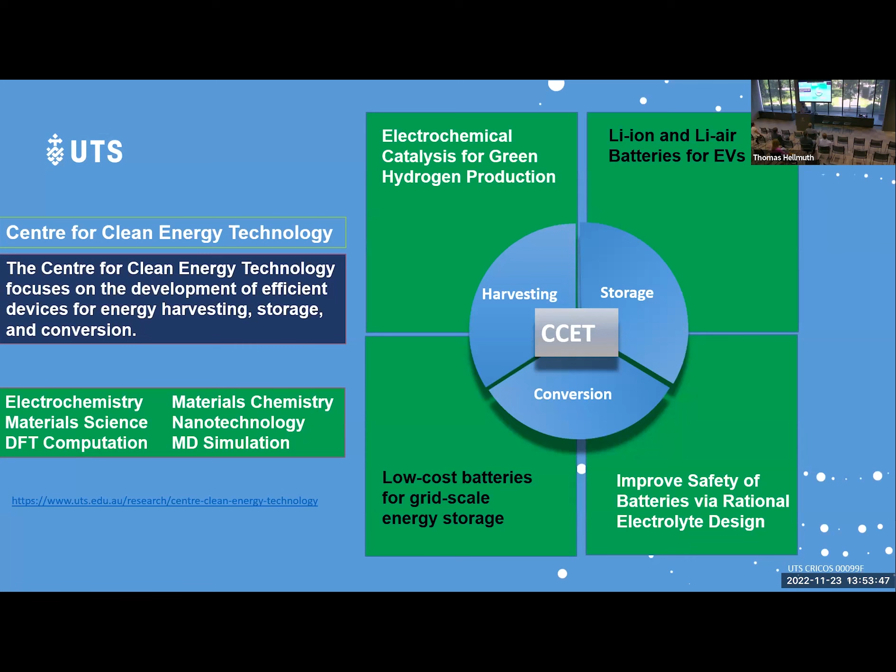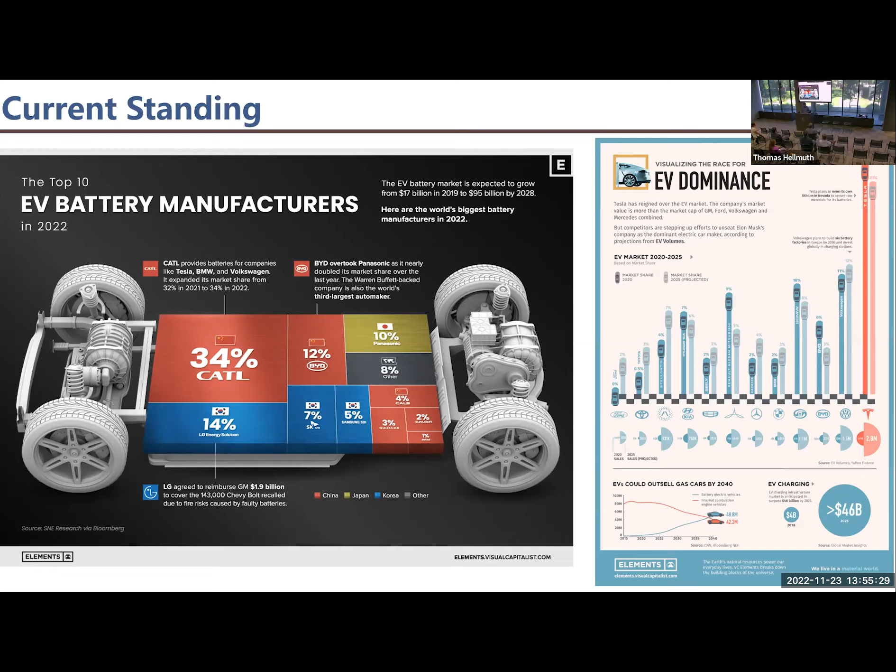And although batteries can be used in a range of different applications, if we just look at the electric vehicle, you can see that almost all big vehicle manufacturers are now manufacturing electric vehicles. And if you go to the right of this picture, you can see Tesla. And Tesla is now sharing nearly 25% of the EV market. And Tesla's market value alone is more than the next 4 competitors combined: GM, Ford, Volkswagen, and Mercedes. So that gives an idea which company is doing what and which company is making the best batteries at the moment.

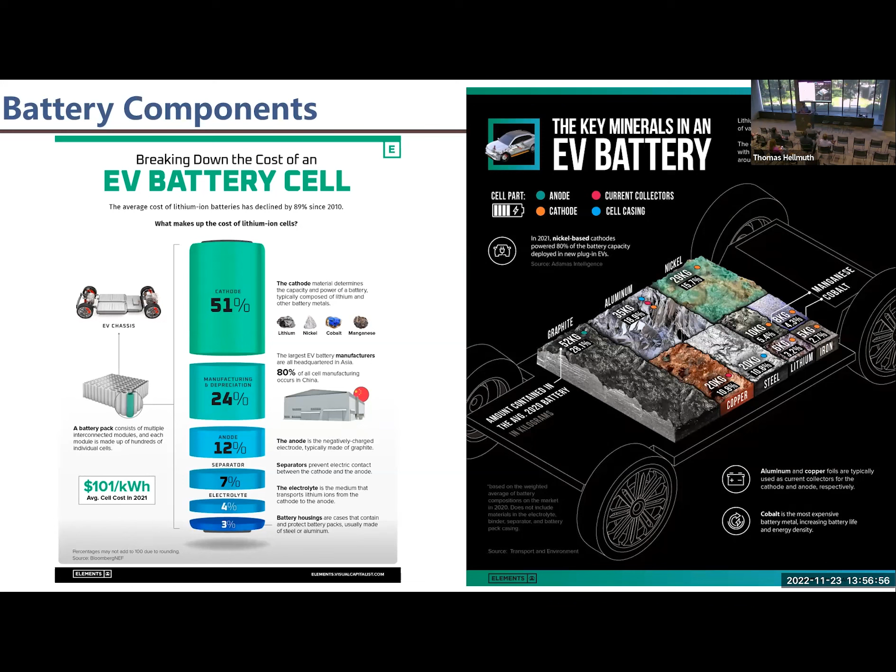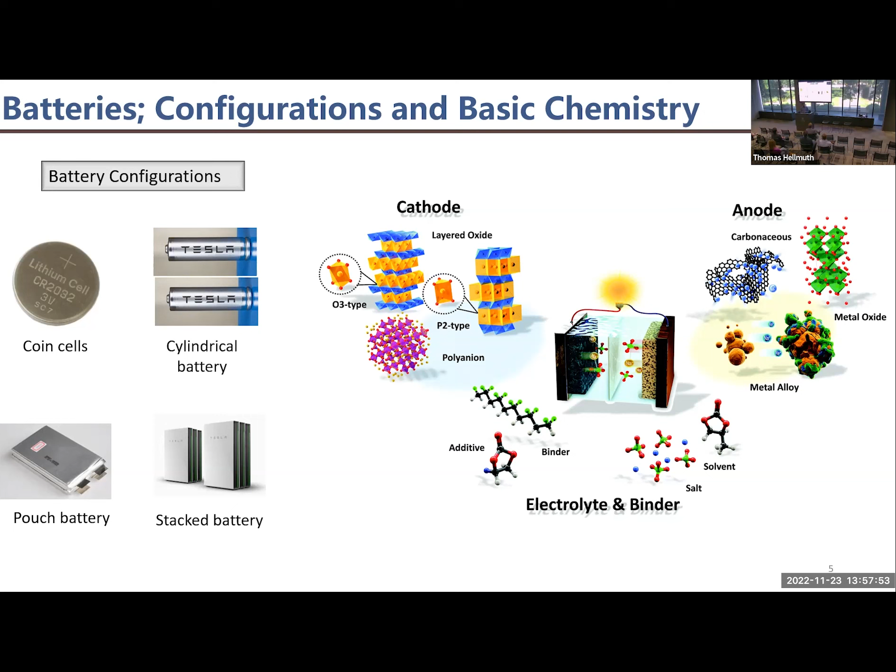And this gives us flexibility in designing the materials. For anode, mostly carbon materials, but transition metals have also been explored in the last 10, 15 years. Cathode materials are mostly compounds containing lithium, lithium-rich materials mostly. Electrolytes, liquids were mostly used previously, but now people are looking at solid electrolytes. So my research is mostly related to anode materials, but our center is working on anode, cathode, and electrolytes. So I will briefly introduce all the research.

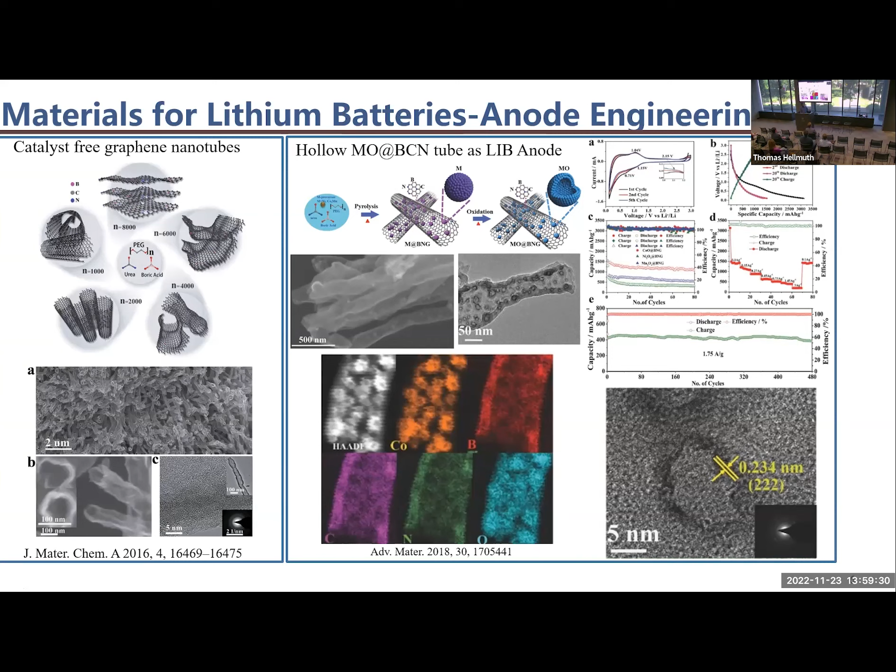So you can see here, these particles were then loaded onto this large diameter tube. And to further stabilize, we created empty spaces inside the particles by a second heat treatment. This provides enough space for reversible volume expansion of the particles. Together, these hybrid materials delivered very good capacity, around 1,400 milliampere hour per gram. That's nearly 4 times that of graphite, and also very good stability up to several hundred cycles. Just to say, there is flexibility in material design. We can design materials in a number of ways. This is just one of them.

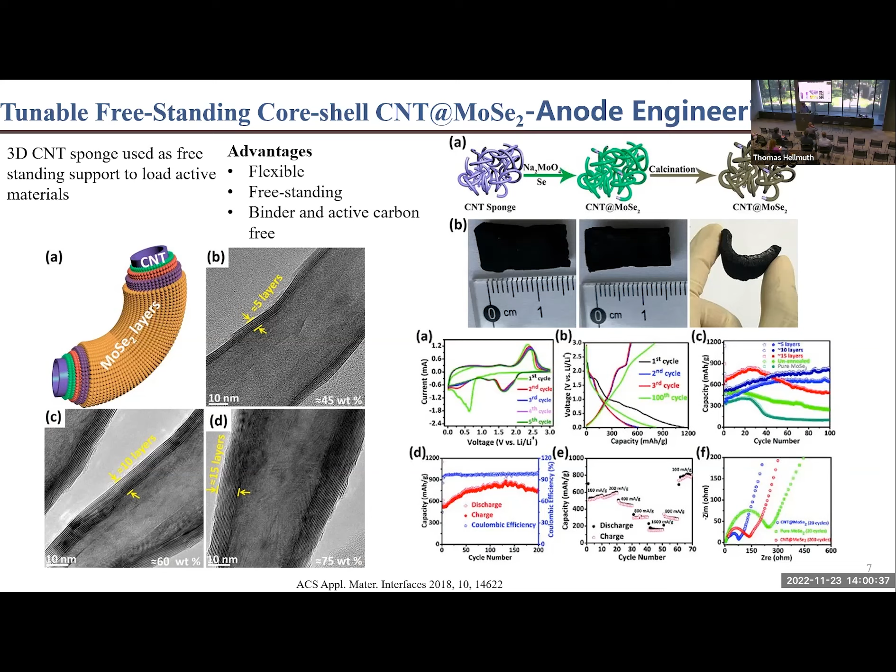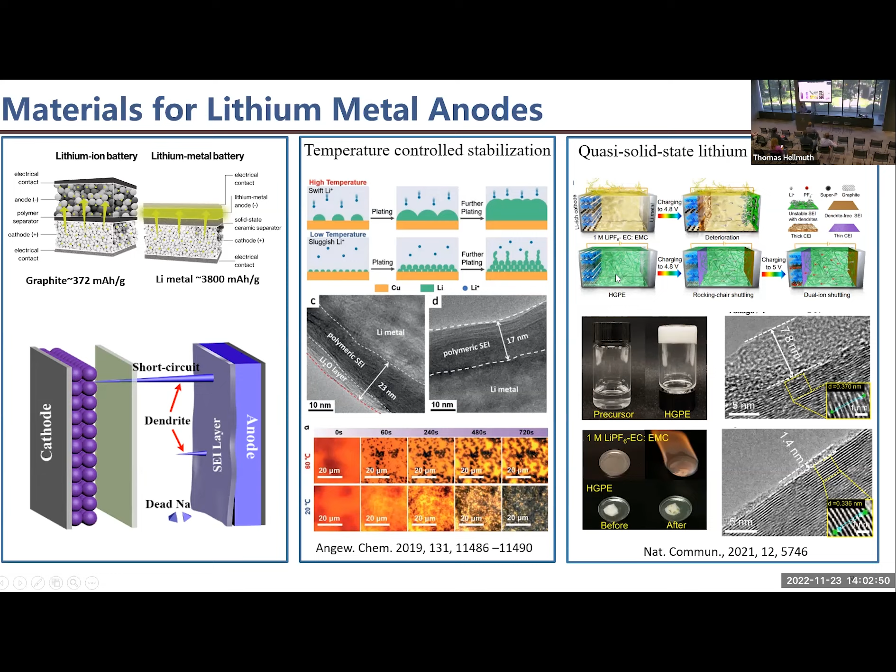Then our group is also working on lithium sulfur batteries, lithium selenium batteries. Sulfur is a very attractive cathode material that gives much higher performance. But one of the key issues with sulfur is that the polysulfides dissolve. Sorry?

Okay, then I will go to the paper which I want to talk about. As we can see, lithium prices are increasing. So our group very recently reported a methodology for lithium extraction from spent batteries. So this is an example for the cylindrical cell. If we open a cylindrical cell and this electrode is passed through this setup, this setup can extract lithium, and then that lithium we can get as lithium hydroxide in the end.

So what we have here is basically a solid electrolyte in these columns. That solid electrolyte is exposed to the electrode. So the lithium from this electrode moves through the solid electrolyte, and then lithium hydroxide solution is passed through this column. And that one dissolves the lithium that is transporting from this electrode through this column to the liquid. And eventually we get this highly concentrated solution. This is a very attractive methodology. So this is how it works.

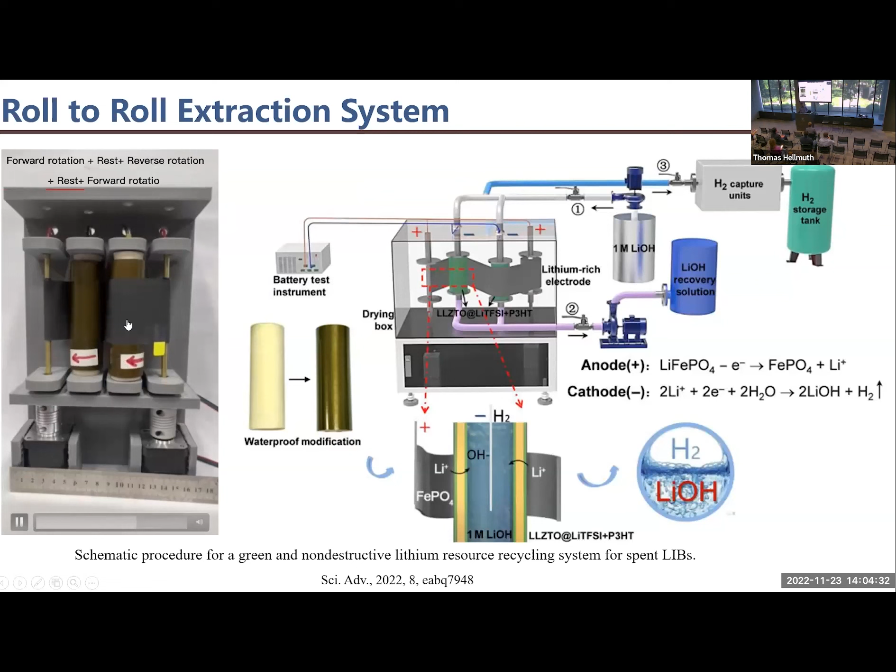I don't know if the video is fine or not, but this is a very attractive method because we don't need any pretreatment. We don't need any high temperature, any decomposition. So basically the electrode surface is maintained so we can extract other metals later. But at the moment, we can directly get lithium. We don't need to do anything. We simply pass our electrodes through these columns, and then we can get the lithium. So that's the idea from this paper.

And if you go by cost, basically, starting from a $1 battery, it can deliver up to $11 of materials at the end. And this is the cover picture that we presented. And of course, we want to reduce cost, increase the performance and increase safety.

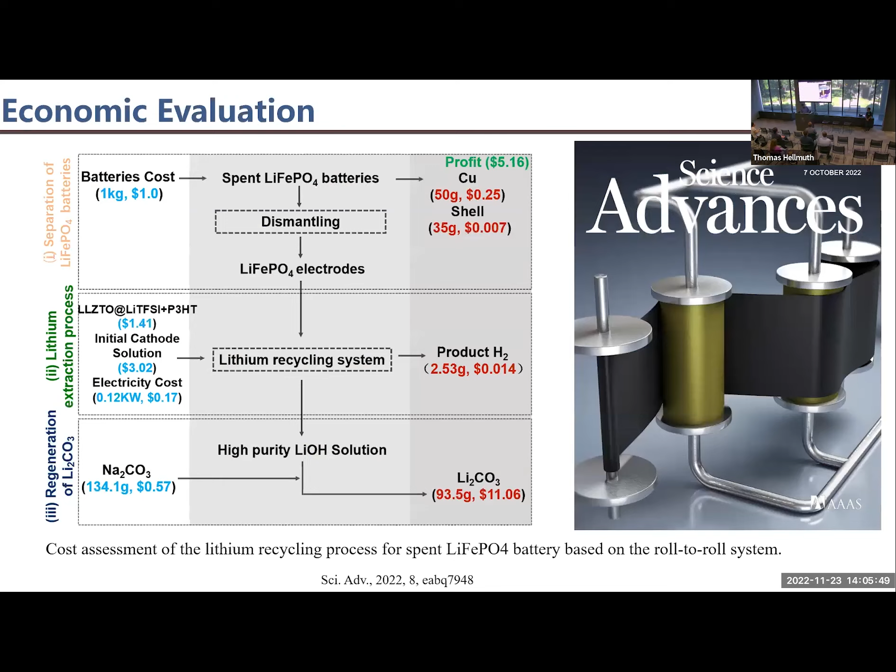Is there interest from the manufacturers directly now? Just because end of life batteries are much harder to dismantle, and we don't have manufacturing in Australia. Can that also be used on LFP batteries? Yes. So basically, if you see here, because of time I could not explain. We tested on a range of different cathode materials, and LFP is one of them. I think that manufacturing might come here. That's fine. Should be.

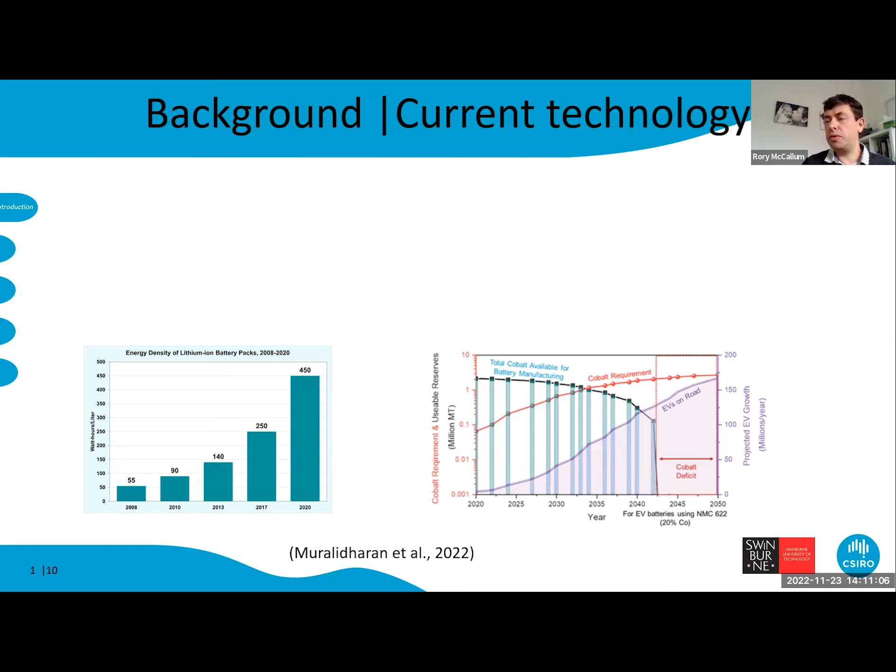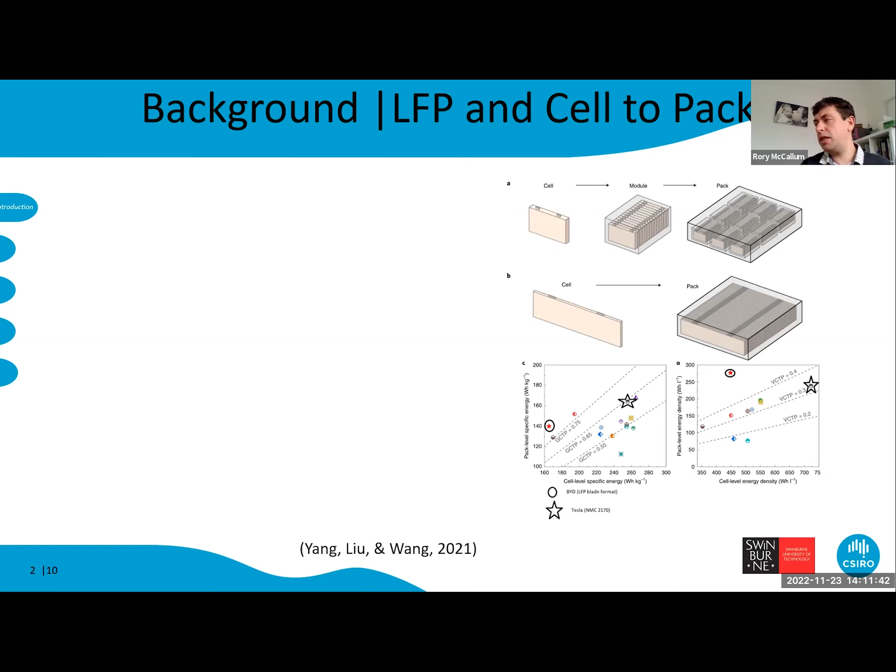If we look at the basic design of a pack, we used to develop cell, module, and pack technologies, where we got small cells, like 18650 cells, built them into modules and stuck them in a pack. The problem with these was that they weren't very energy dense - in some technologies only 20% of the whole pack was battery. Now we've moved to this more cell-to-pack design. CATL and BYD have both moved to this kind of technology, where we build single cells as big as a pack and get much higher energy density, so we can have 80% of the pack now just battery cell.

LFP is preferred, especially in China, because of safety requirements and because they have access to LFP - that's the main reason, they don't have cobalt. But it's also more thermally stable, so you can get even higher energy densities relative to the original cell density.

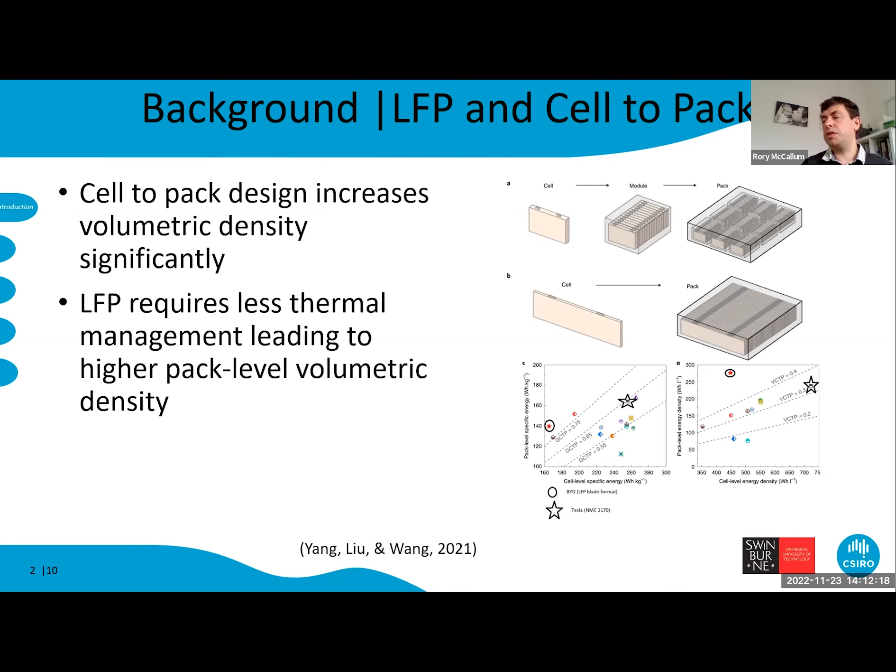Recently, Nature's Sustainability Expert Panel released a report in May, and there's a few key things I found within the report. One was the need to replace LiPF6 - it's quite toxic to produce, you have to use HF and a lot of other nasty chemicals, and you've got a problem with the PF6 when recycling it, that it can possibly produce HF gas. That's one issue, and the need to remove cobalt because of the negative health and environmental impacts within the Congo, where about 50% of the cobalt currently comes from. They also spoke about the need for less flammable electrolytes, just so they're easier to handle and don't result in as many fires, and then therefore spilling potentially toxic chemicals after the fires.

One of the big issues with fires is the thermal runaway process. So just to explain briefly what that is: we have some kind of mechanical, electrical, or thermal event - this can be piercing of the cell, deformation, overcharging, over-discharging, or just heating the battery up too much. This leads to decomposition of the SEI, a protective layer that makes lithium-ion batteries possible. It's on the anode, and then the anode starts to react with the electrolyte. We get further increases in temperature, the separator potentially decomposing, and then we get the cathode and eventually electrolyte decomposition. So if we can stop any of these steps along the way, we can really limit this thermal runaway process.

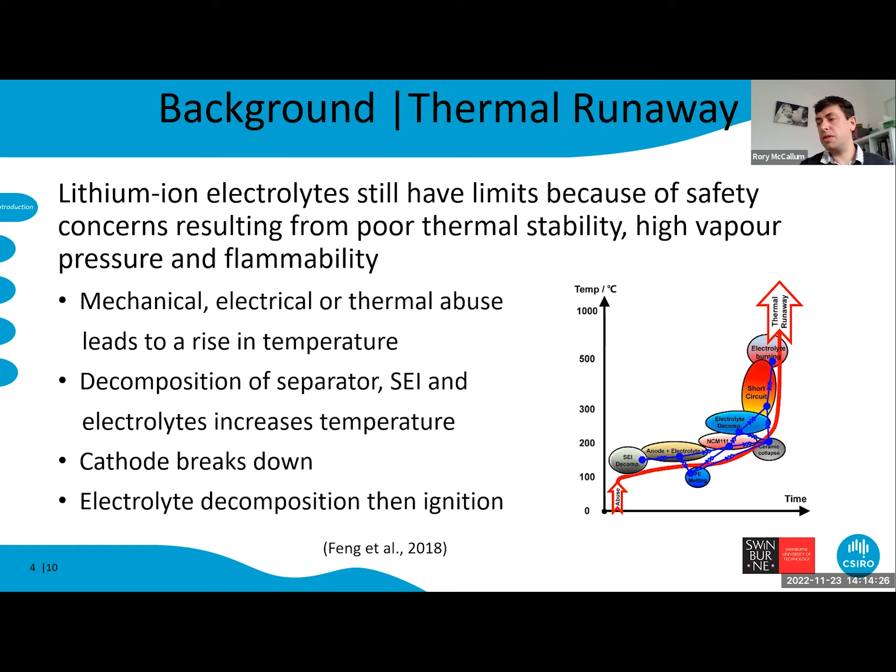This is one reason that lithium iron phosphate is preferred, because it's less likely to decompose. But this is at about 100 degrees that this starts to happen.

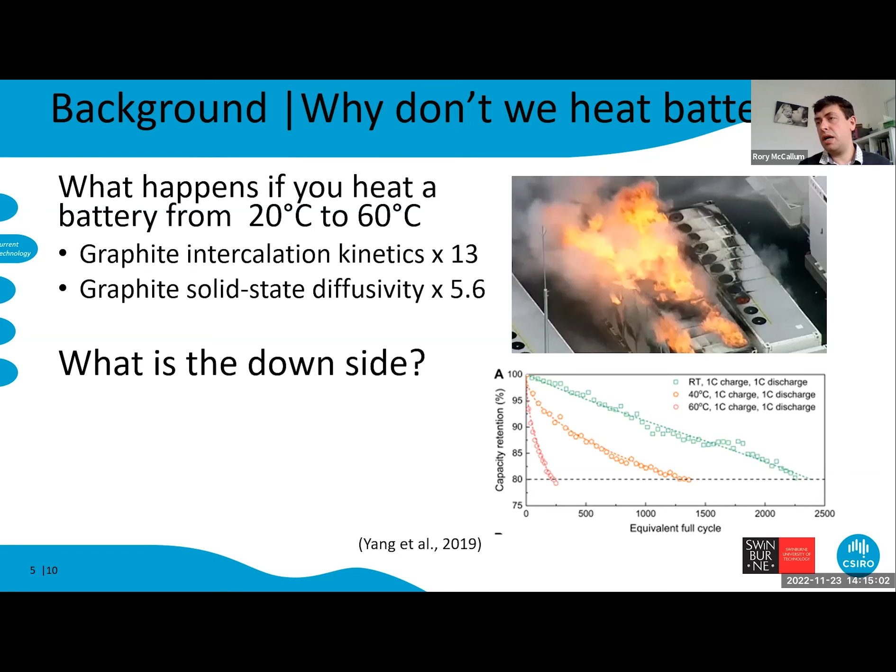But if we just look at what happens if we heat batteries up to 60 degrees, well below the limit of thermal runaway, we see increases in graphite intercalation and solid state diffusion. We also see electrolyte conductivity increase by almost double.

And so this leads to a much faster charging and discharging cell. It also means that we go from around 2000 cycles, if we charge at 1 hour charge, 1 hour discharge, down to around 250. This is because of the growth of chemical reactions at the anode and the SEI layer, the protective layer of the anode, and ultimately decomposition of the electrolyte.

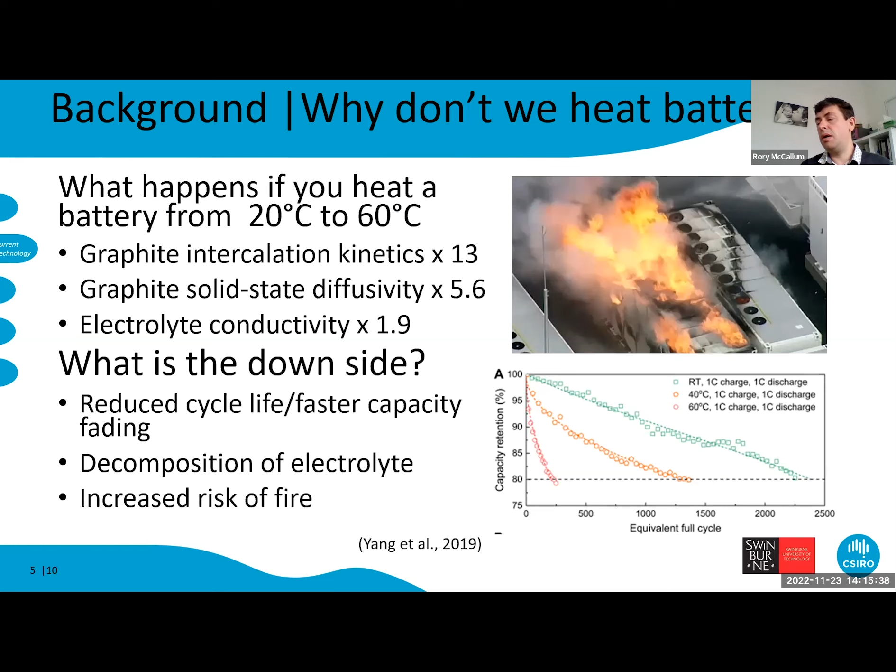And this also increases fire risk. So there's some big issues. But what happens if we just heat it whilst we're using it in an EV situation, where most of the time they're just stationary?

Well, we can see if we take an LFP cell and do this, we get really high driving ranges in all conditions. This is the red line versus the blue line for the standard LFP cell, and we see high power delivery under all conditions. It only uses about 2 to 4% of the battery pack to heat it up, and we can charge them in 6 minutes, using just standard off-the-shelf LFP cells.

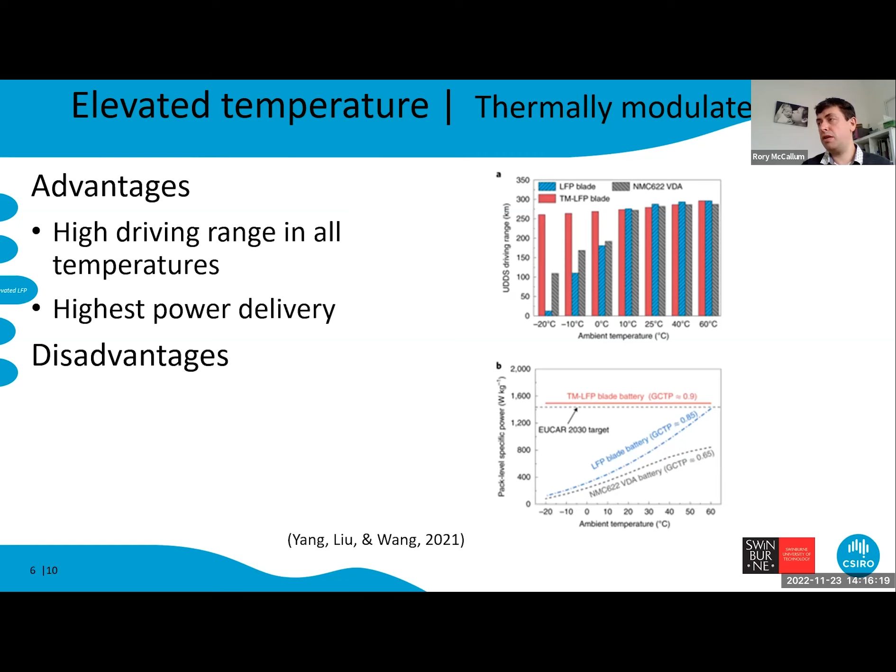We've still got lower energy densities than NMC, and still got flammable electrolytes, so if something does go wrong, they are still flammable.

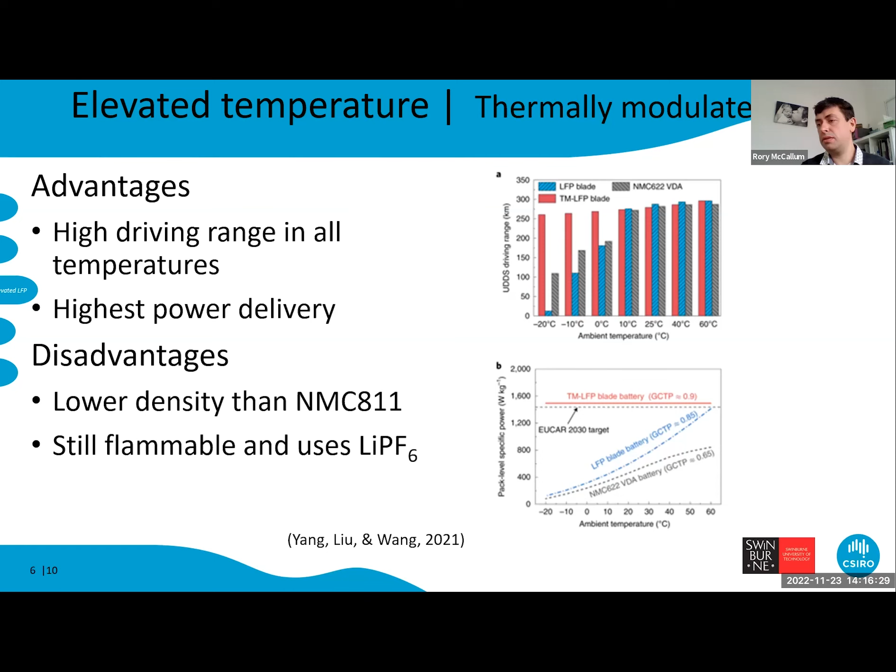So if we look at some other electrolytes used at high temperature, we have the ammonium, phosphonium, boronium ionic liquids, and these all perform well at high temperature. They only perform well at high temperature generally, and there's a cost issue often associated with ionic liquids.

If we look at additives, we can look at fluoroethylene carbonate. That's often used as an additive and helps prevent SEI decomposition.

And high salt concentration and bisalt systems. So we can think about water in salt electrolytes, or we can use these DME with bisalt systems. Here we can see we can get conductivities actually higher at those higher temperatures than even the standard electrolytes. But they're still quite flammable.

And of course, solid electrolytes, which are always only a couple of years away, the kind of fusion of the battery world. But supposedly it's only a couple more years till we have a working product. They also have some very good safety characteristics potentially.

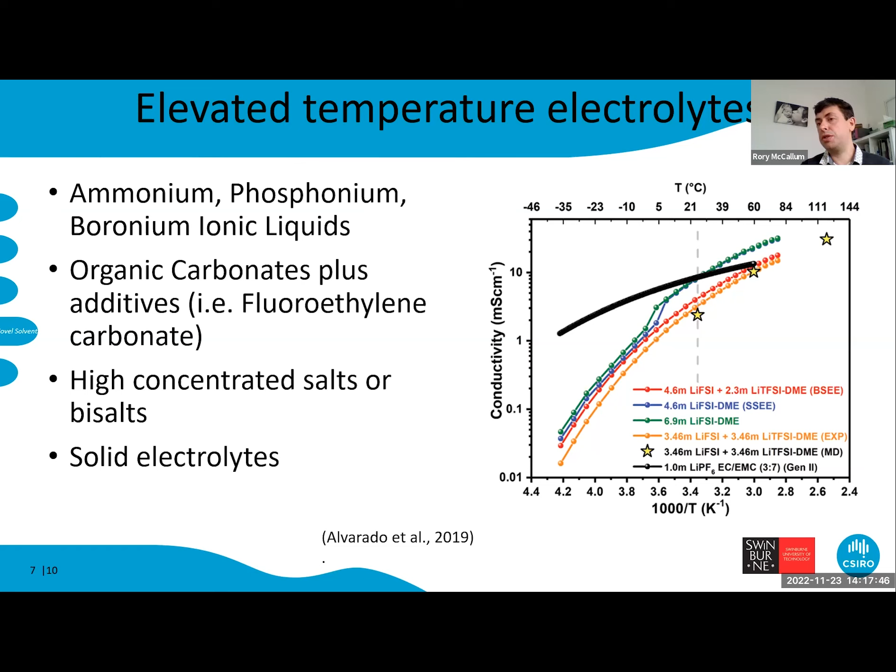So my project is focusing on natural and naturally derived solvents. Some of the key benefits are they can be made from biomass. You can think of lignin and cellulose, for instance, used to make some of these solvents. And they can be really low cost.

We're talking down to $1 a litre. I mean, obviously we're going to have high purity solvents, but $1 a litre for 99% purity is pretty good.

We have a diversity of chemical structure that's really hard to synthesize. So if you look at nicotine here, we have the building blocks of a pyrrolidinium, and we see similar melting and boiling points to, or close to that of, some of our ionic liquids.

We know what the toxicity is. Nicotine is arguably the most dangerous chemical on the planet, but we know how it's going to function, and it's been previously tested. Cyrene, on the other hand, is quite benign and is a good replacement for NMP in an environmentally sustainable way.

There are always challenges when using naturally derived solvents. Electrochemical stability is probably the key one for batteries. You kind of know what you're looking for to get that stability, but once you mix it all in a solution, everything changes. We have issues around solubility, which have to be tested.

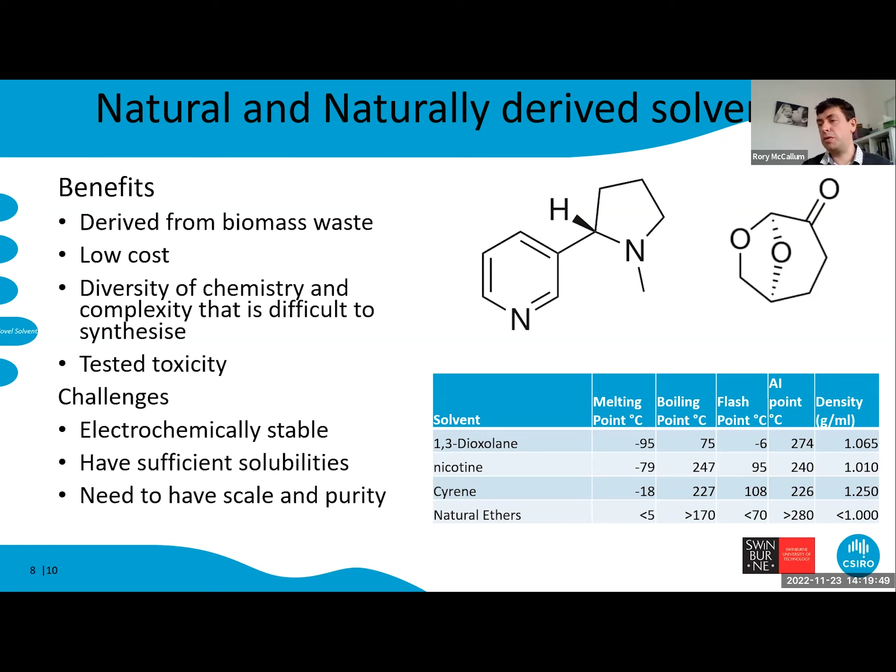You often see papers where they're using $3,000 a litre chemicals, $3,000 a gram chemicals. It needs to be something we can get from a common plant or a common source, not some rare Himalayan flower or something. It needs to be quite accessible.

So the aims of my project have been to develop an electrolyte system that will deliver that high pack level density by solving the thermal runaway issues, or solving some of the engineering problems with chemical solutions rather than the other way around. And to make electrolytes that are greener, safer and cheaper, hopefully, than current technology.

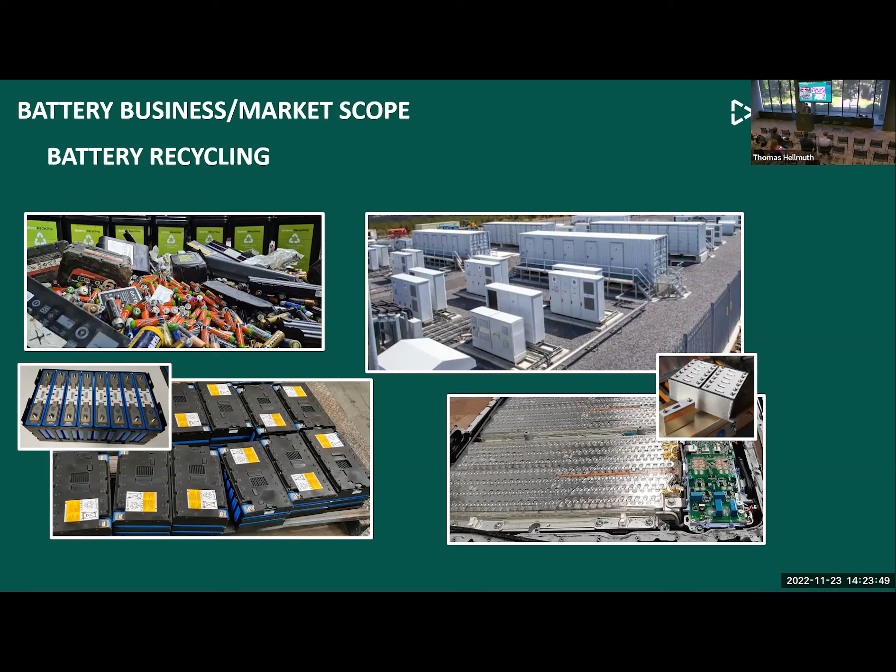So what we offer to the industry is the solution for collection and management of these batteries. So we don't want batteries to go to landfill. We all hear the news of fires in landfill and curbside collection. So because we're focused on the end of life of small batteries currently, we've looked at the management of that first, and we're developing our ways to deal with the big batteries and how those consumers will be serviced in that area.

So from small collection units, because of the size of a large collection unit, just to risk mitigate is how this all sort of started. So when you've got large containers full of batteries, we have a large risk. So we've developed small containers for retail type of collection, and then transport through to larger pallet size units for storage and safer service offerings to customers. So this is sort of the first step to a recycling business - how do you move these things around and how do you make the collection safer is how we offer that.

This is the problem next - now we have to deal with transport. So transporting batteries in Australia is difficult because they have to move far. They're not close together, like maybe at a mine site or something, where we could say we've just got a large deposit of lithium or cobalt, which would be nice. However, our problem now is looking at logistics, and this is going to grow. If we've got EVs, a small volume of EVs in Australia, how are we going to manage those from the car service centres back to recycling centres?

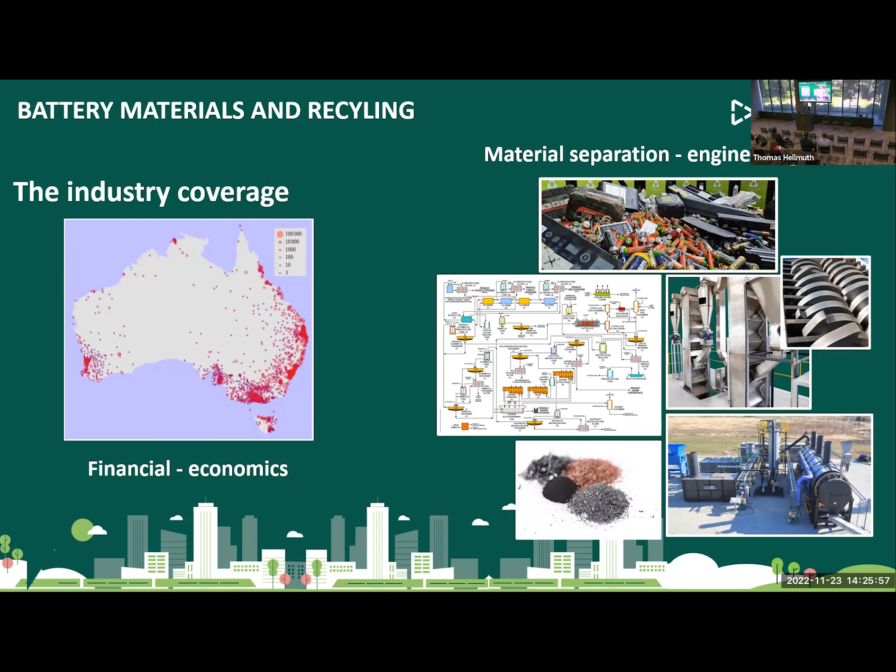So this is the next challenge. It's nice to have technical sites. They're very expensive. If we model on what's happening in Asia, China, Korea, they're 40,000, 100,000 ton plants already because they've got that waste from production waste. We don't have that. We have end of life waste. So we've got a lot of other tricks to manage in Australia, and there needs to be awareness built around that, because it's a charge and we haven't even pulled the battery apart yet, and we have got these problems.

So next, this is the opportunity. Those are the problems in Australia coming. This is the opportunity that's coming. Waste arising, the first two charts in the background, is calculated from volume of battery sales. This is an independent source. I'm not even sure if it's CSIRO, so I won't mention who it is, but this is some work being done by federal governments and stewardship bodies to look at the waste that's coming. Batteries have been a priority waste for the federal government for the last few years, so this is why. We're looking roughly at about 2030 to have 100,000 tonnes of lithium batteries as waste. So that's what we've got to get ready for.

The chart there in the middle is the lithium demand, and the mining industry is so focused on expansion at the moment because they can see there's a huge shortfall. By the time you get to 2030, there's a lithium shortfall that they're flagging in that gap. And it's also with nickel, cobalt, and graphite. So we see ourselves, from that waste arising in Australia, if we can capture the stream of material, dismantle it, get rid of the plastics, and manage the anode and cathode, we hope that we're the solution to help fill that gap. Otherwise, this is not a circular business at all. And that's what we have to be mindful of, to get brand awareness, get the people who are responsible for bringing batteries to the country managing it better, because it's difficult here. So if we truly want a circular economy for batteries, it's the cathode and anode powder that are circular, anode maybe not, but that's what our plan is.

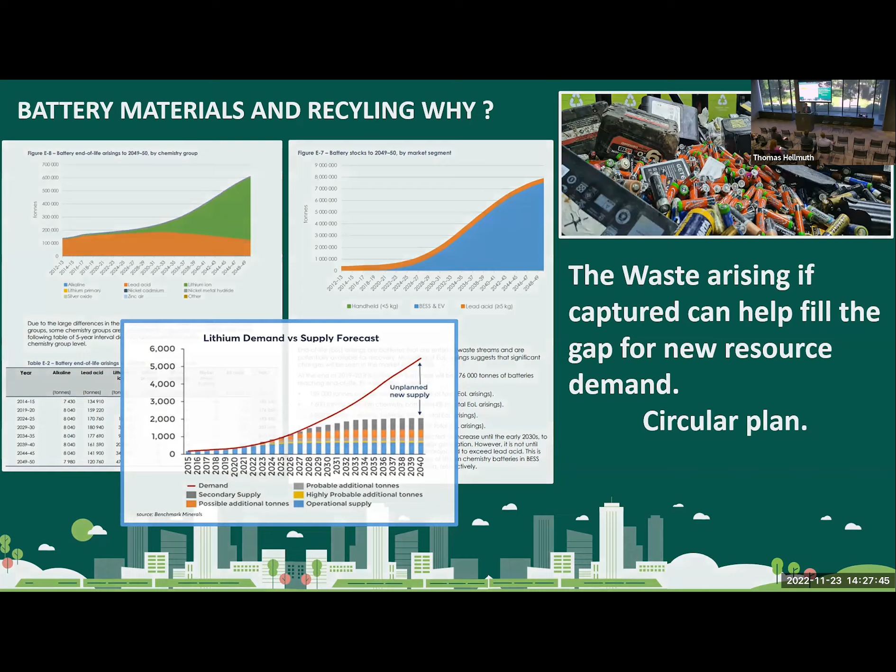So how we do it, again, more regulation. We've got to move these batteries under dangerous goods. We've got to be very careful and mindful that we don't use conventional waste transport, whether that's scrap metal or household. So it's, again, tricky. Sorry to harp on it, but I need to make sure, if there are any brands listening, they take care of how that ownership works. You can't pass batteries onto the household and then expect that the household has the equipment to manage that properly. Whether it's a scooter, an e-bike, an electric vehicle, we're very mindful that this is a tricky product to move.

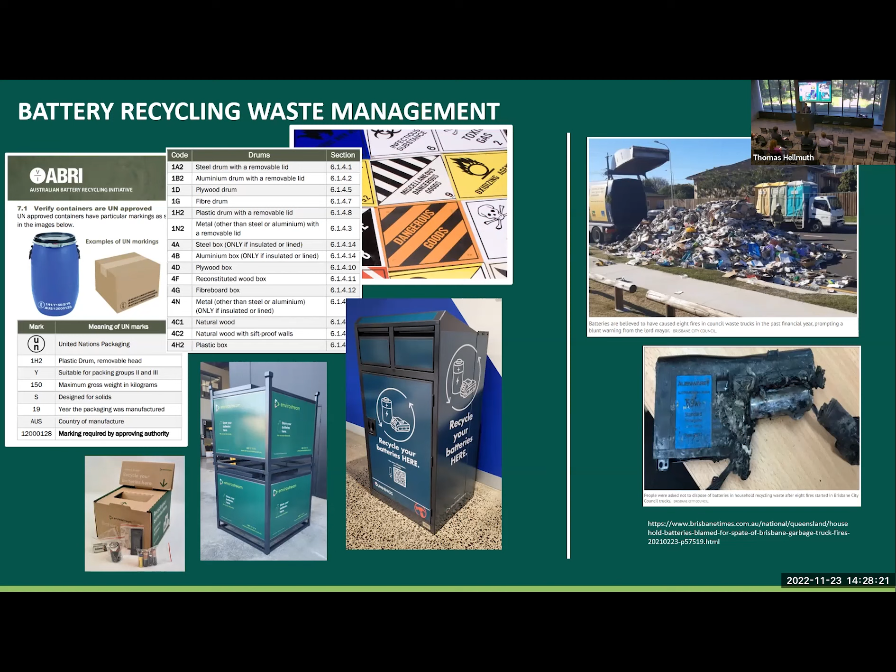We now have to be careful at our end. When we receive batteries, we can't just be flippant and say they can go to anybody who can recycle, because there have been multiple battery fires in factories that have burned to the ground through large stockpiles. Under the EPA rules now, for every 4 tonnes we have to have a way to manage that with fire rated walls. So that's the dark green area in our factories. We're only allowed to store 4 tonnes of batteries in each zone. That's how the EPA, the Environmental Protection in Australia, is looking at batteries. So again, this is a cost to the recycling industry to make sure that recycling is done effectively. We still haven't processed the battery yet.

So this is the process, in short, just mindful of time. The hazards that we've got to deal with other than fire. Discharging batteries: we don't necessarily discharge all batteries because a lot have IP ratings, IP67, so they're waterproof. People putting batteries in salt water to discharge the energy was the first sort of en masse discharging. There's electronic discharging, all these different plugs, so it's a bit tricky. We don't have nice cells, 18650 cells. We have packs of batteries. We have modules of batteries. So our process is to shred the battery fully charged. We can't rely on it being discharged, so we assume that all batteries are fully charged.

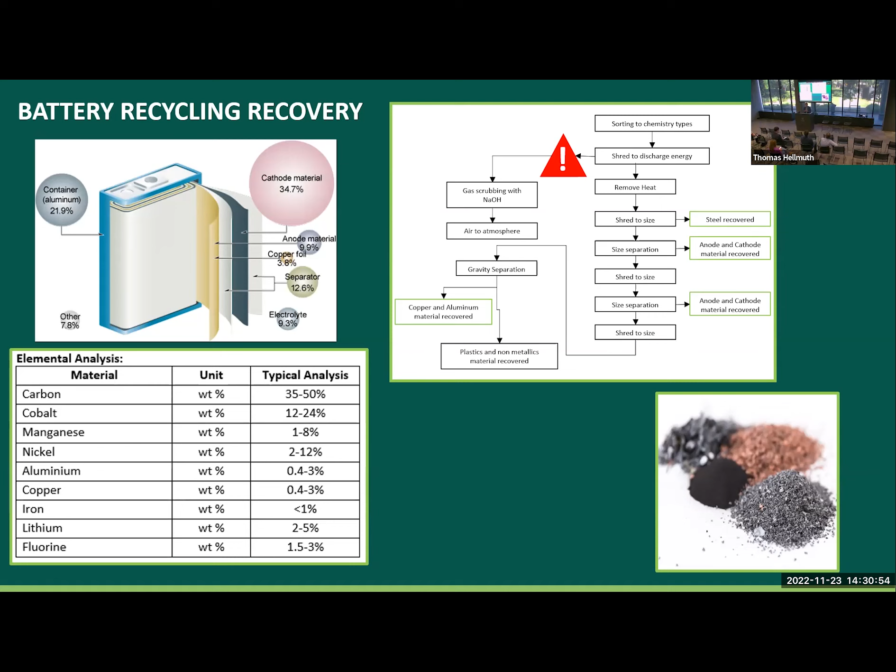And that's why the question to Asif was, yeah, it's nice to have that process. Unfortunately for us, it can be tricky, but that's why I asked, it's good if you're looking at different chemistries, because as a recycler, you've got to mix. So again, we now go through the fire and the discharging, and the control mechanisms we have for cooling that down so we don't create more HF gas.

And if we create a hot product as we go, there's some talk of vapor clouds and things like this that batteries are generating. You see those on YouTube. There's fire research being done: when batteries are charged at about 85, 90 degrees, an LCO battery will let a fume out. So we're also dealing with hydrogen gas and a few other products if we get it too hot. So we have to cool everything down and we just use water.

The other is the organics from the battery chemistries that we have to clean out of the water before we can reuse it. So the water that we do clean, we can then create a small waste stream of lime and a few other solids that we use for extraction in that process. Oh, sorry, I should step back a sec. So what we create is the anode and cathode mix.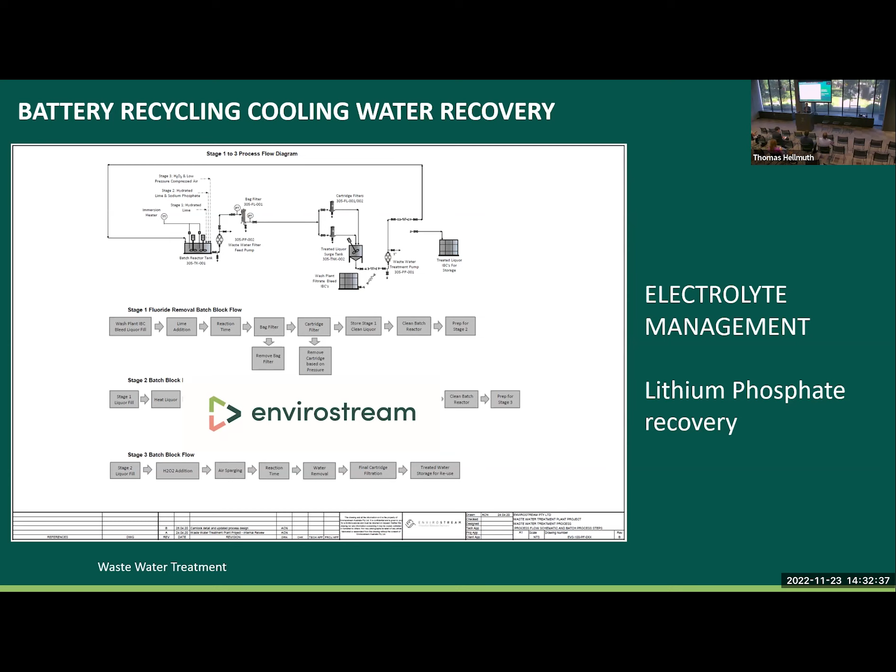So in Australia, we don't have a hydromet process. There's technology to prove that it works and you can do it. However, we do have to be realistic. We only have a small volume. So even if we had all the batteries that were available today at end of life, we're looking at about 3,000 tonnes. So if we could get all 3,000 tonnes, we'd only have about 1,000, 1,200 tonnes of MMD, mixed metal powders, mixed metal dust, black mass. It's called a few things, but it's essentially the cathode and anode powder of the battery.

So we sell that onto the market to South Korea currently, and they will extract further nickel sulfates, cobalt sulfates, lithium carbonate, and sell that back to the battery market. So our cathode powder, we know that's circular. Some of the graphite is lower value, so lower percentage than what's reusable in batteries.

So that will go to make electrodes or lubrication. So mainly electrodes for arc furnaces or lubrication industries. The copper and the aluminium from the foils we can sell into the local scrap market, and that gets reused for metal recovery. So that's really it from me.

I know I'm trying to talk fast, but hopefully there's some questions, and I'm not sure if Thomas is online, but if he's got some extra time. But that's us in a nutshell. It's a tricky industry. It's a growing industry and we're really thankful to be here today and to present. And yeah, if there's any questions, happy to take them.

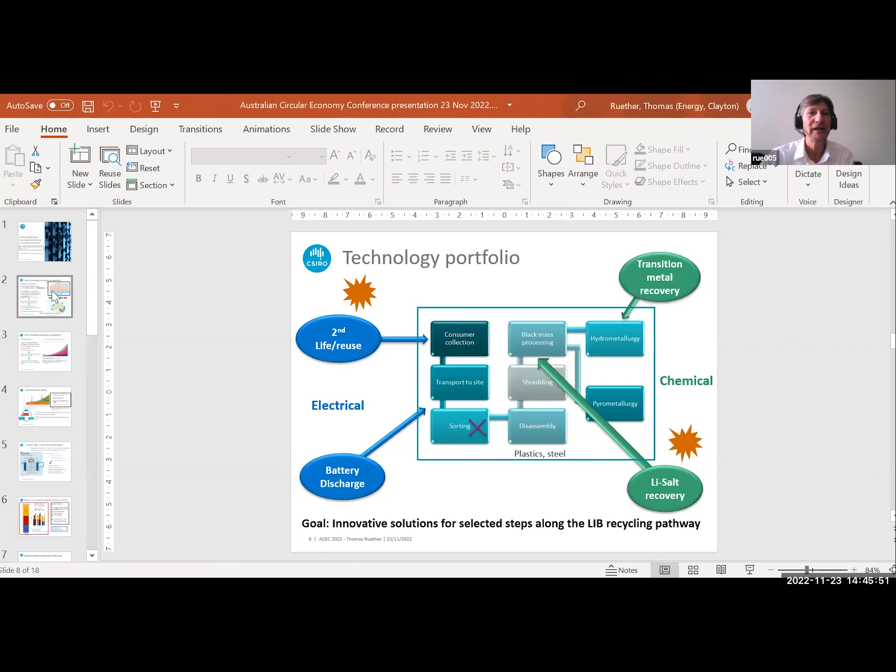To begin with, I'd like to make a case for batteries. There are two prime reasons. One is electricity generation: electricity consumption in Australia is very high, 200 terawatt hours per year, which accounts for about 30% of total emissions, because it's mainly generated from coal and gas utilities.

Excuse me, Thomas, can you click the PowerPoint mode so it's bigger? Oh, yeah, sorry. Thank you. All right. And I will try to use, where's my pointer options here, laser pointer.

Given that Australia has the best solar and wind conditions globally, it would make sense to generate this electricity from these sources, which until recently has been difficult due to the lack of a proper storage system to deal with the intermittency. But given the rise of electricity generation from renewables, the installation of large-scale batteries, electrical energy storage systems, has risen quite significantly, as you can see here on this map.

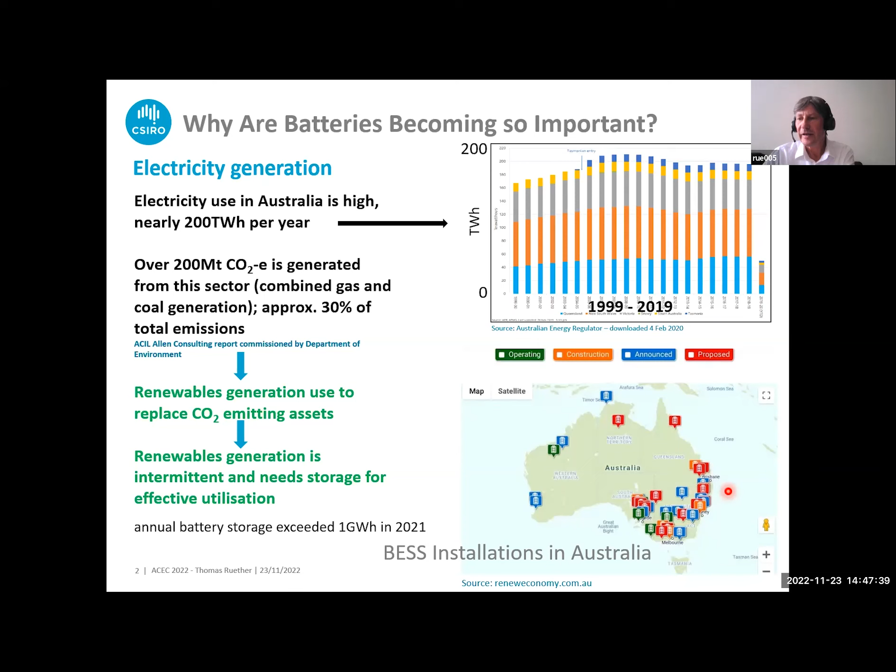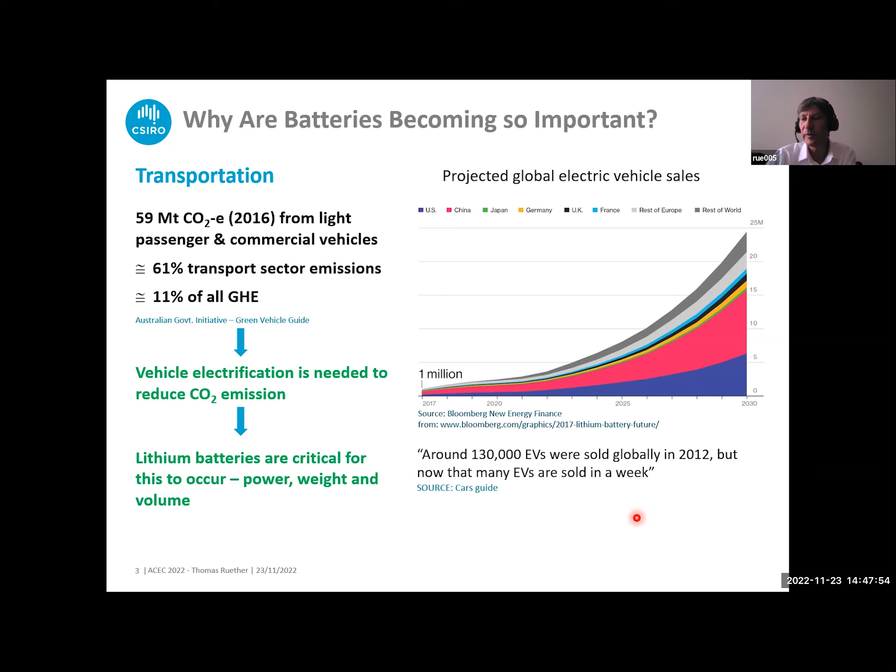The second reason is transportation, which accounts for about 10 to 15% of overall emissions. So electrification of the vehicle sector is needed and now possible with modern lithium batteries. In terms of circular economy and sustainability, the obvious questions arising are: how do we deal with the emerging waste streams for batteries? Do we have an end-of-life strategy for it? And what is the environmental impact of producing lithium batteries?

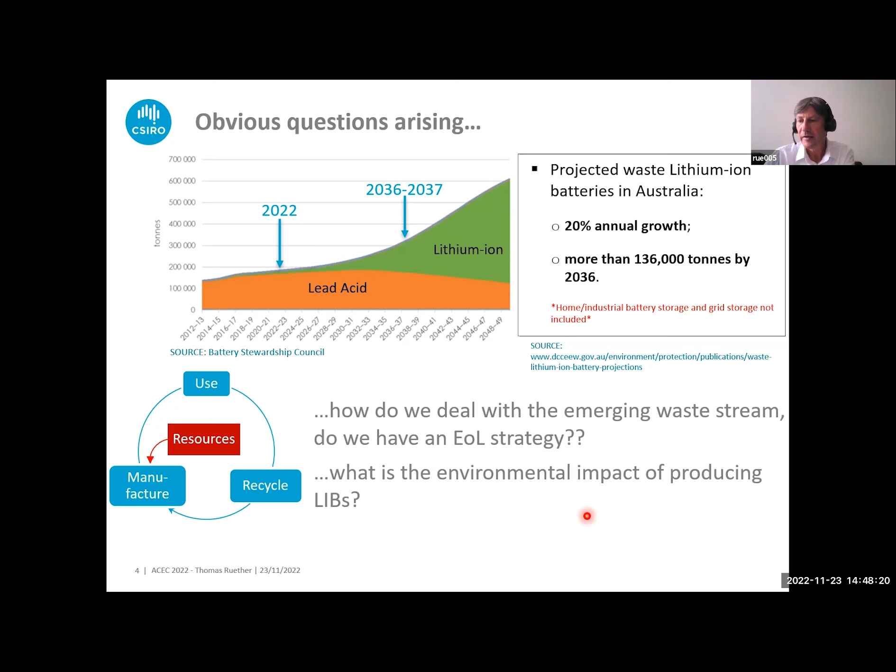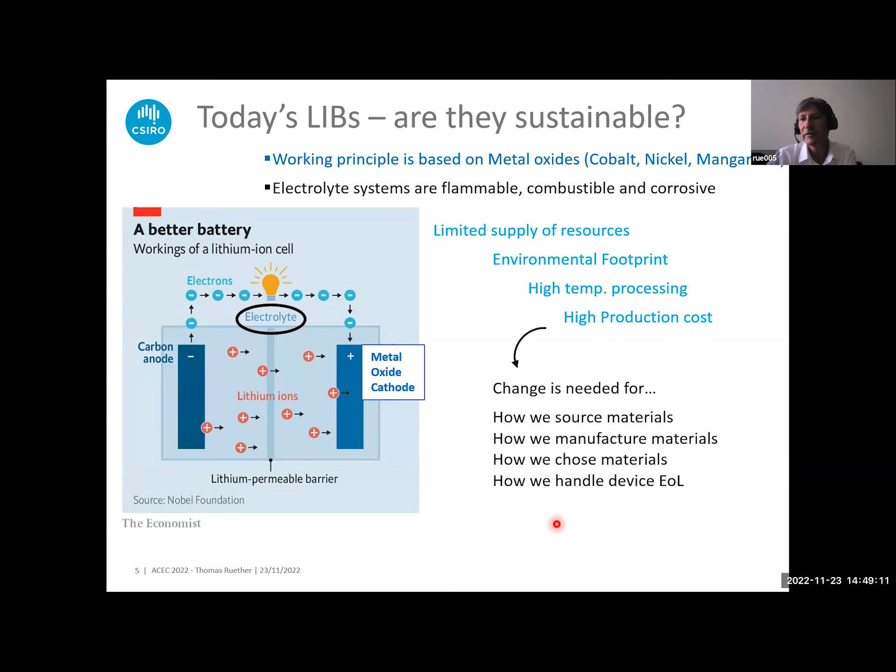So the working principle of commercial lithium-ion batteries is based on the use of metal oxides from cobalt, nickel, manganese, and in the future more iron, and an electrolyte system which is flammable, combustible, and very corrosive. This causes many concerns around limited supply of resources and the environmental footprint of these devices. High temperature processing is involved, and the production costs can be very high. So to deal with these concerns, change is needed in how we source materials, how we manufacture them, how we choose them, and how we handle the end of life of the devices.

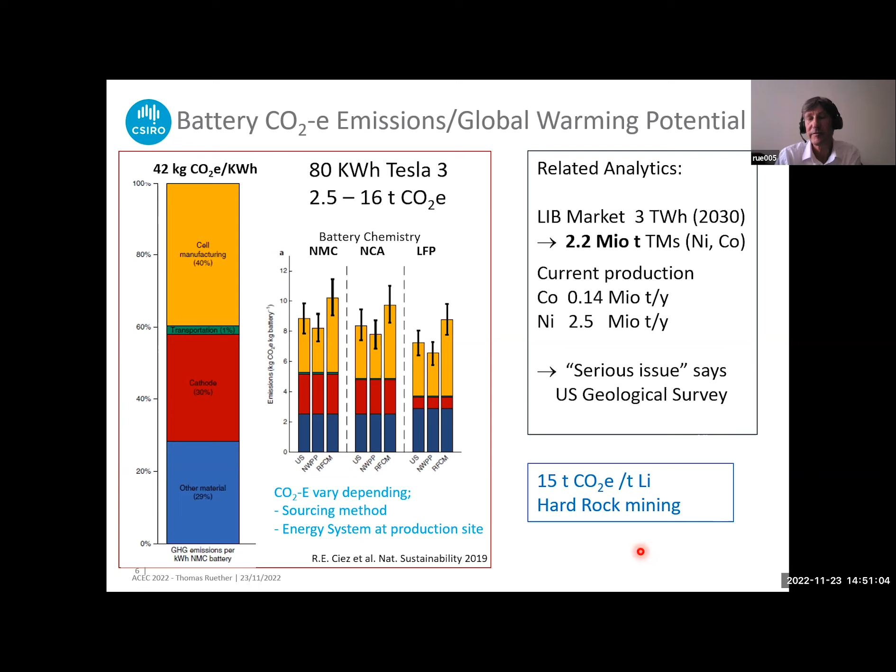Concerning the sourcing of the required materials, the US Geological Survey has raised serious issues, because the predicted lithium battery market will rise to around 3 terawatt hours in 2030, requiring about 2 million tons of nickel and cobalt. And for info, lithium hard rock mining produces about 15 tons of carbon dioxide equivalents per ton of lithium. With these background facts, CSIRO's long-standing lithium battery research group in Melbourne developed projects around lithium battery recycling 4 years ago.

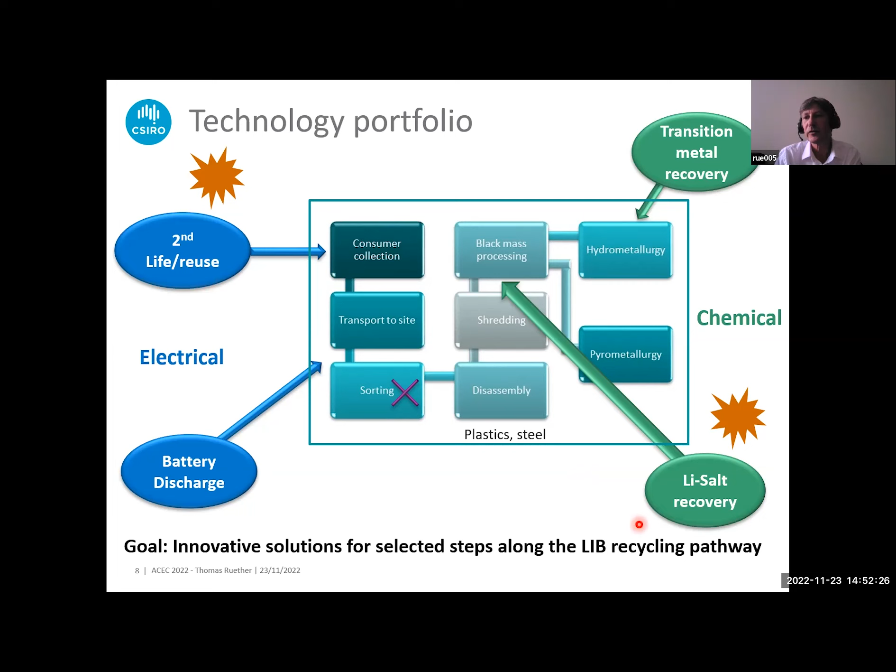After the common prelude phase of surveying the landscape, including stakeholder interviews, we came up with 4 key areas to invest in: 2 electrical portfolios addressing second life reuse and battery discharge, and 2 chemical portfolios to address the various steps in the lithium battery recycling pathway. So the current key focus areas are around the second life reuse of batteries and the recovery of the lithium salt in the batteries.

Some of the processes also take this a little bit further and recover the high value materials, cobalt, nickel, and lithium, and also graphite from it. So what we're doing at CSIRO is to look at processes which are coming in at the front end of existing lithium battery recycling processes.

The second life reuse is done for EV packs, which typically still contain 70 to 80% of their original capacity, and so they can be principally reused for other applications.

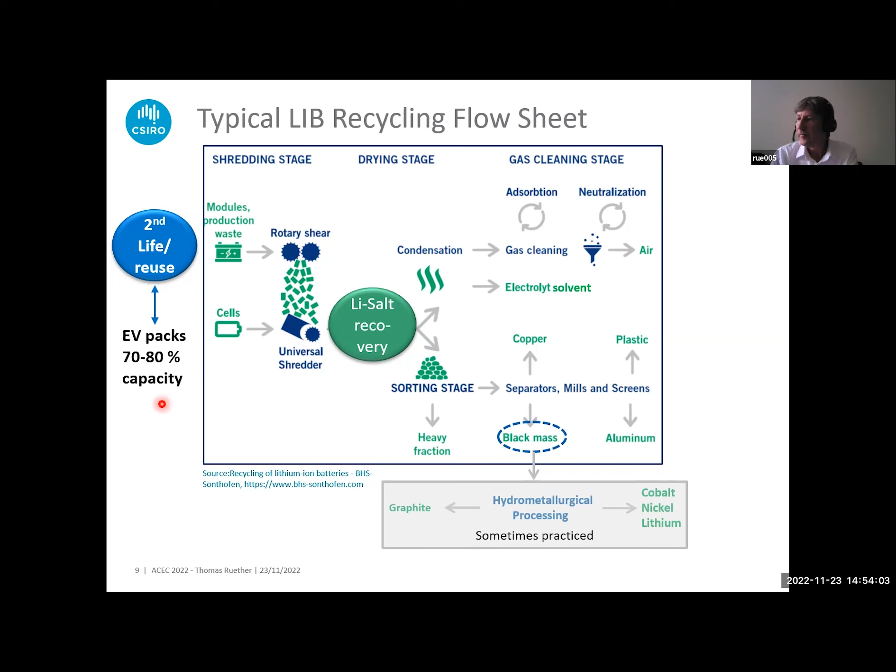For the purpose of extending the battery pack's lifetime before it enters the battery recycling, CSIRO has developed a versatile battery management system which allows us to perform a health check on entire battery packs without completely disassembling them, which would be very labor intensive and therefore prohibitive.

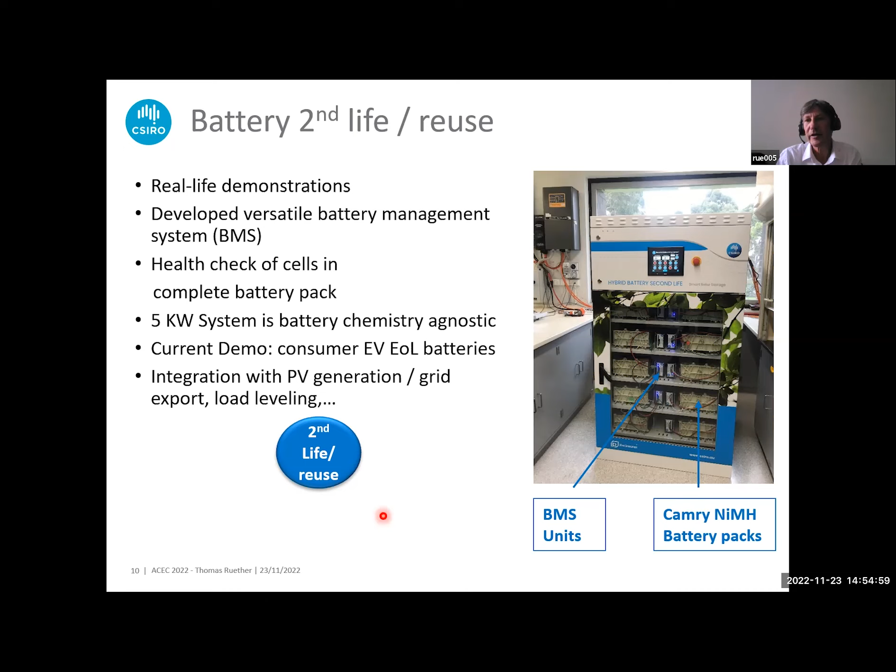So the picture here shows our 5 kilowatt system. It's a demo system currently set up with 10 nickel metal hydride Toyota Camry battery packs. But because our battery management technology is battery chemistry agnostic, it can also be used for lithium batteries.

So the value proposition of our lithium salt recovery technology has a monetary and material use aspect. In the material use aspect, we are looking at how high value lithium battery components like cobalt, nickel, and lithium can be recovered in a common existing process. Here, lithium is extracted typically as lithium hydroxide or as lithium carbonate, and these then have to be further processed in a complex conversion process to make the LiPF6, which is the common lithium salt in every commercially used lithium-ion battery.

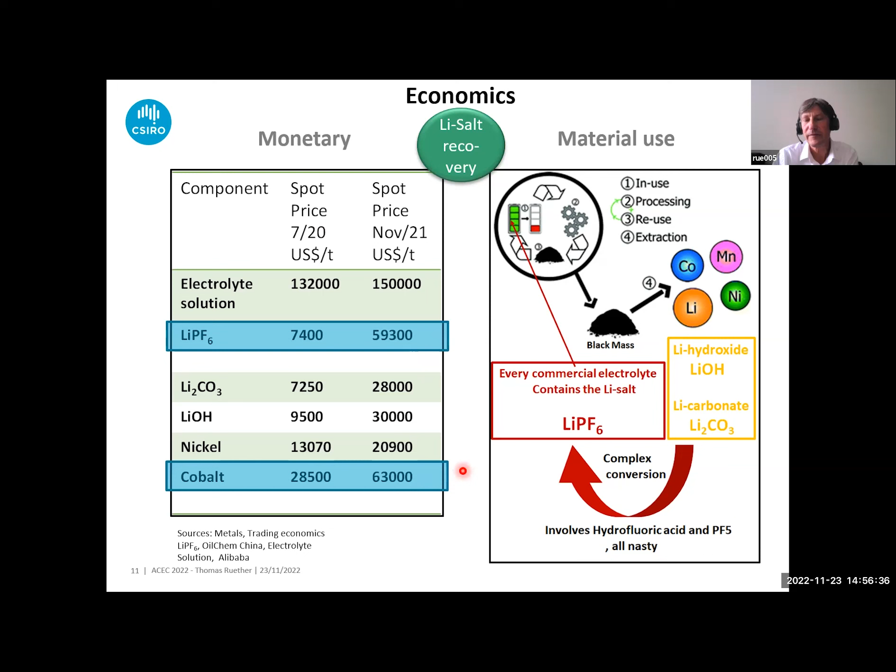For our process development, our aim was to come up with a practical, economic, and sustainable process which uses common chemical engineering methodology. We wanted to avoid the unsustainable practice of using...

Excuse me, 2 minutes left. Oh, not more than that. Okay, I leave it there.

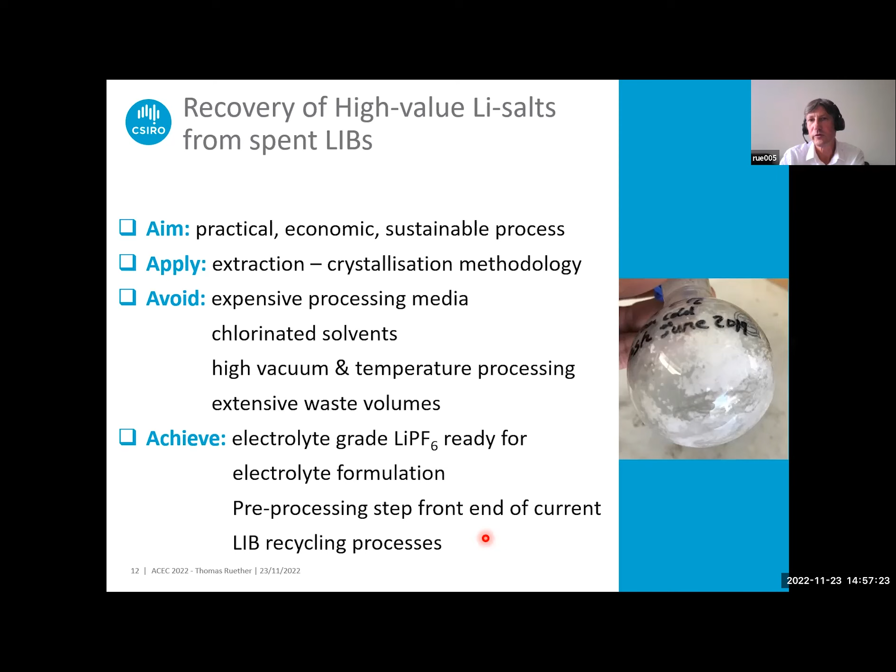The liquid phase is then treated in a crystallization step where we recover the LiPF6 as a solid material, which can be used for electrolyte reformulation. And the solvents used in the process can, in principle, be recycled in the overall process.

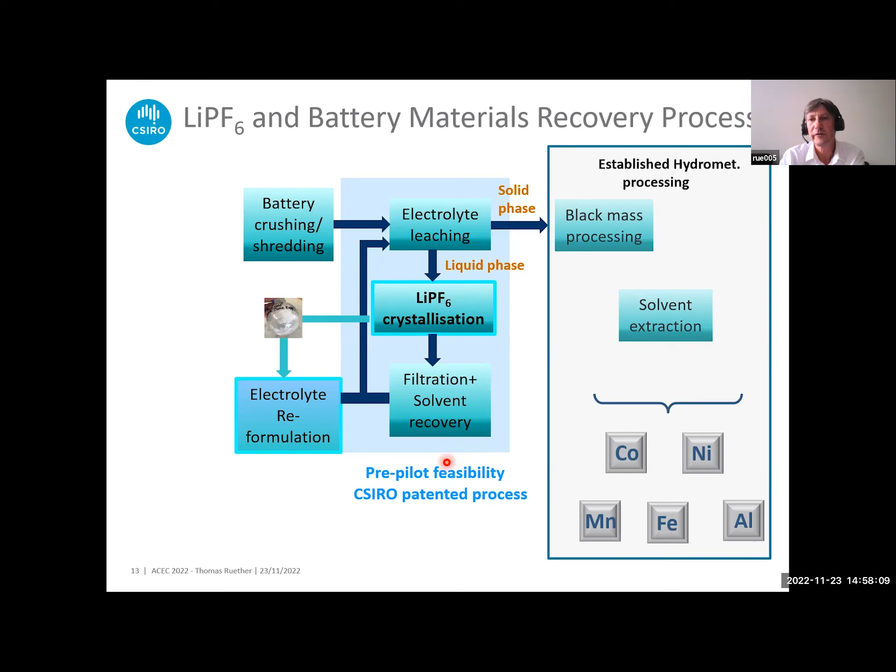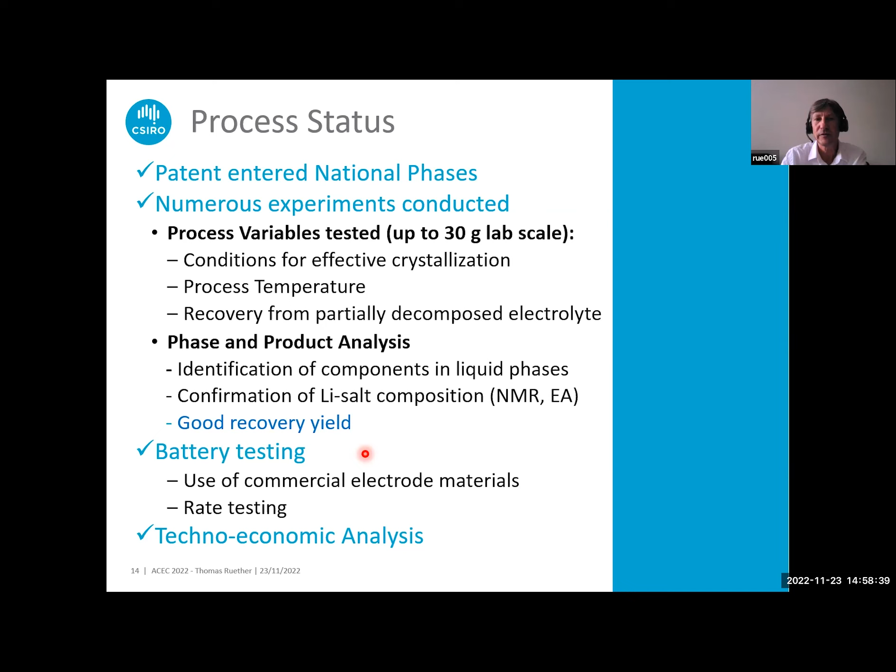So the patent of our process is now entering national phases. We have done many experiments up to 30 gram scale. We have identified the product and the recovery yields are pretty good. Battery testing was done, which was our homework, so making formulations of electrolytes with our salt and then testing them in batteries. And we also did techno-economic analysis.